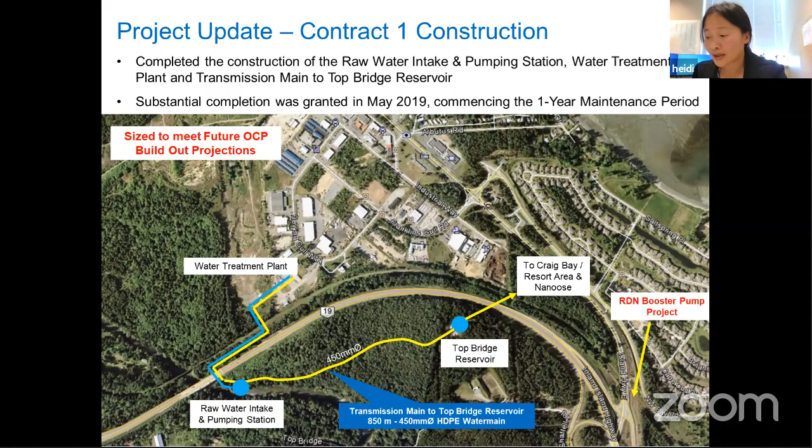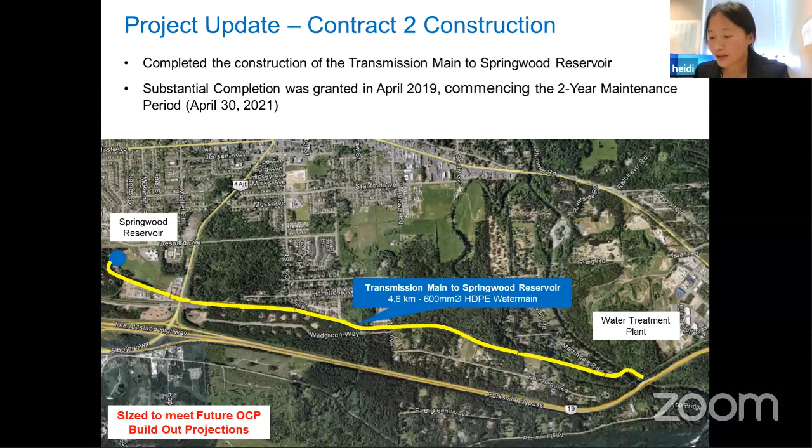Construction project update. Contract 1 works consists of the raw water intake, raw water pump station, water treatment plant, and transmission main to Top Bridge Reservoir. Substantial completion was achieved in May 2019, commencing a 1-year maintenance period. Contract 2 work consists of the installation of 4.6 kilometers of transmission main from the treatment plant to Springwood Reservoir. Substantial completion was achieved in April 2019, commencing a 2-year maintenance period, with final acceptance expected in April 2021.

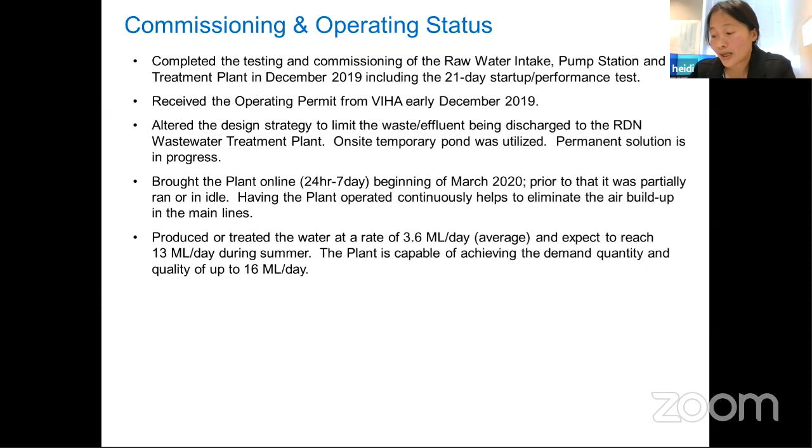Currently, the treatment plant is treating water at an average rate of 3.6 million liters per day and we expect to reach 13 million liters per day during the summer. The plant is capable of meeting the design max day demand of 16 million liters per day.

Here is an overview of our water consumption trend. The black lines are total yearly usage from 2015 to 2019. The yellow lines are how much was drawn from the river from 2015 to 2019. The red line is this year's consumption, 2020.

It shows our average is about 3.6 million liters per day. There was a peak day of 7.4 million liters per day in April due to COVID, and our summers are drier. The green band is the average usage from the Nanoose Bay area of 650 cubic meters per day to 850 cubic meters per day.

The blue line is how much is being drawn from the river this year. Normally in the winter, the river wouldn't be used due to the high turbidity level. However, with the treatment plant now online, we will continue to utilize more surface water from the river as opposed to our wells.

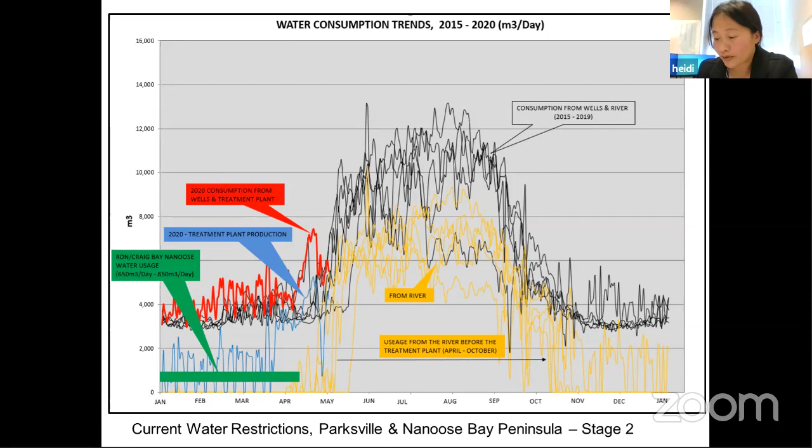So, our raw water intake structures and operations. Daily, we monitor the intake structure to ensure the screens are free of sand. As mentioned earlier, the river water level fluctuates up to 2 meters during heavy rainfall events, and as expected, we experience higher turbidity levels during storm events.

The recent rain event suspended the operation of the plant for 1 day to allow for removal of the sand, rocks, and boulders that built up outside of the intake structure.

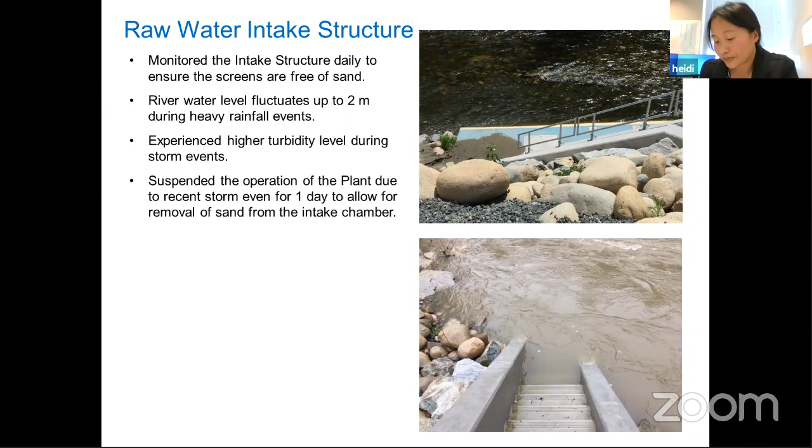This storm event saw the river level reach 4.5 meters, and we had to suspend the operation of the treatment plant for 1 day. It had moved large boulders, rocks, logs, and sand to the intake, restricting flow entering the system.

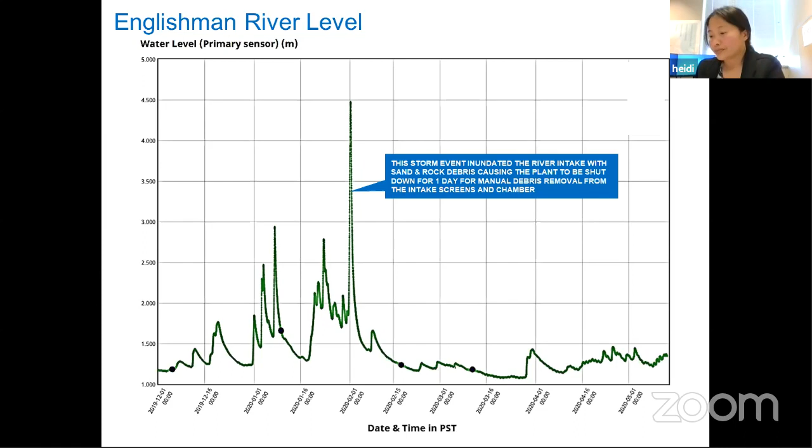So, our water testing and sampling: to date, we found the river turbidity level can go from 0.4 to 200 NTU during storm events. Here are some photos of the raw water samples.

During storm events, higher coagulant dosing was used. However, we expect to ease off or eliminate the usage of coagulant during summer months.

Turbidity level after treatment is less than 0.1 NTU, and our permit requires 1 NTU. We are well below that level.

pH adjustment: the raw water pH is measured at 6 to 7.5. This level is within range. However, it was suggested to increase the pH level to 8.8 to 9.2 to provide corrosion control to our distribution system and our end users.

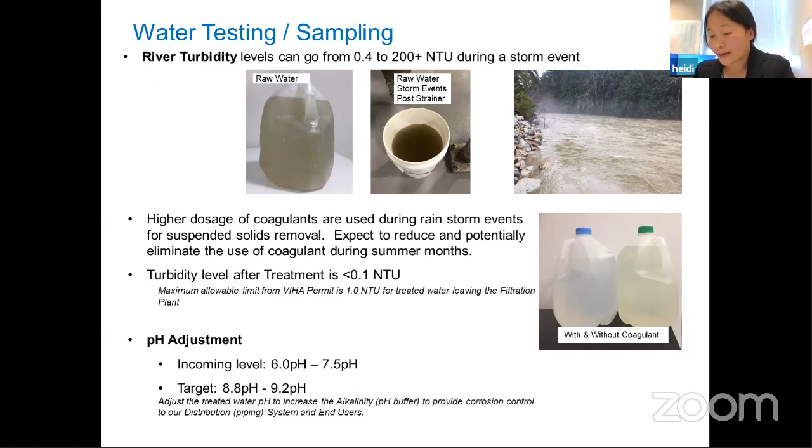Our ongoing works: we continue to work closely with our partners, consultants, contractors, and suppliers to optimize the treatment process and address deficiencies that were noted during the commissioning stage.

These items included constructing a dewatering system to handle the waste flow, monitoring the system to reduce wear and tear on the pump seal assembly at the raw water pump station, addressing and bringing sodium hydroxide pump number 2 online as standby, and addressing the stains and discolorations on the buildings.

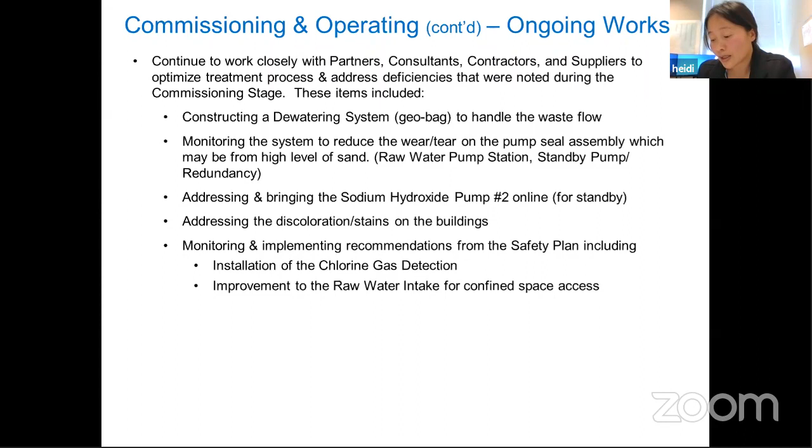Implementing recommendations from the safety plan, including installation of chlorine gas detection and improvements to the raw water intake for confined space access. So, those are the ongoing works.

Project photos. Here is an overview of our pump and treatment process.

Water from the river intake is being pumped to the treatment plant, going through the sand separator, coagulant process, strainer, primary filtration, UV, chlorine, and pH adjustment, with the last stage being to pump to the reservoir for storage.

The rejected water from the primary treatment process is sent to the secondary membrane for further treatment and goes through the same process. The rejected water from the second system gets neutralized and directed to the pond. The system is very efficient, 99% — only 1% of the raw river water goes to the waste stream.

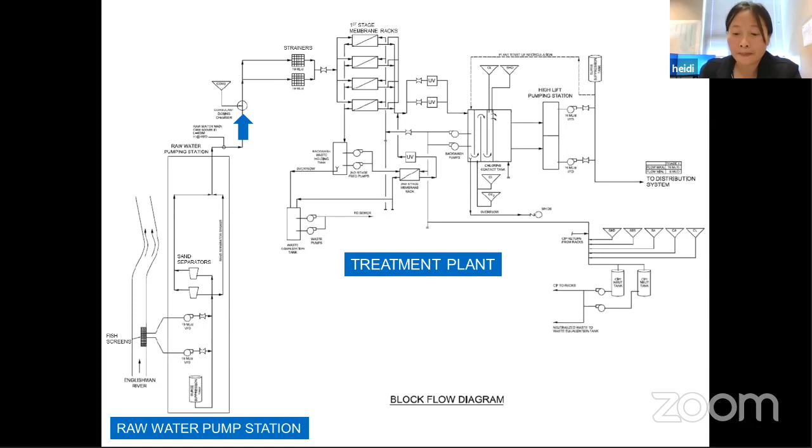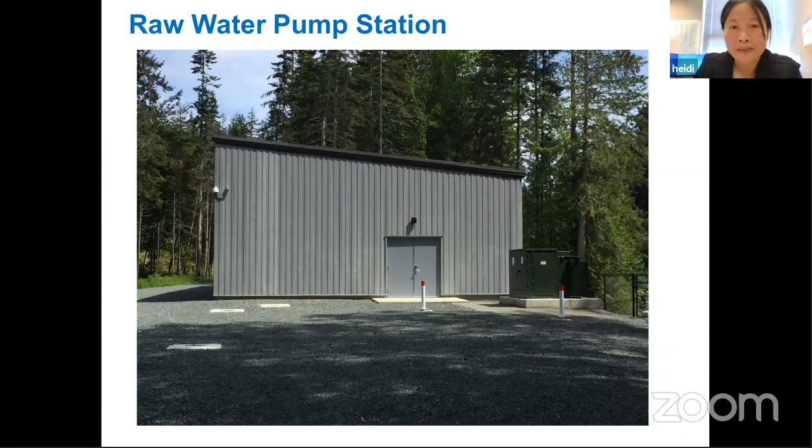Picture of the raw water pump station on the outside, and inside the raw water pump station showing the raw water pumps.

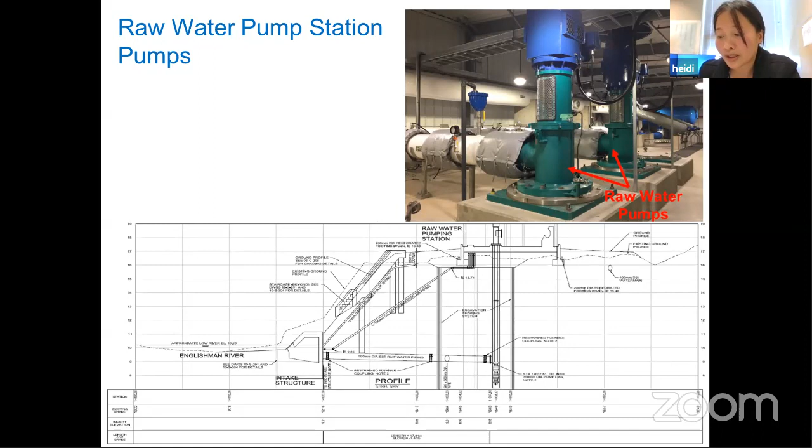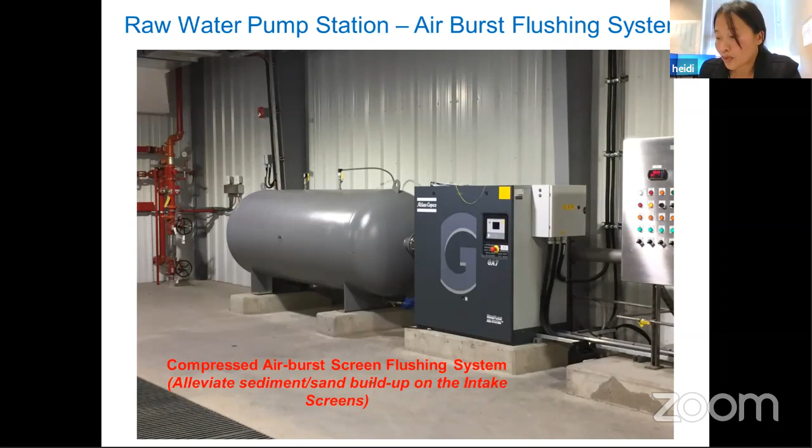Compressed air burst system. This process is to bust the sand from the raw water intake structure. Photo of the sand separator, which removes all the sand before sending the water to the treatment plant.

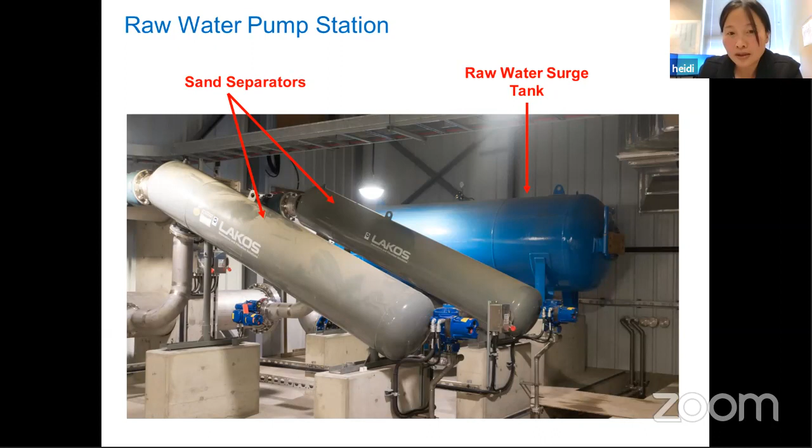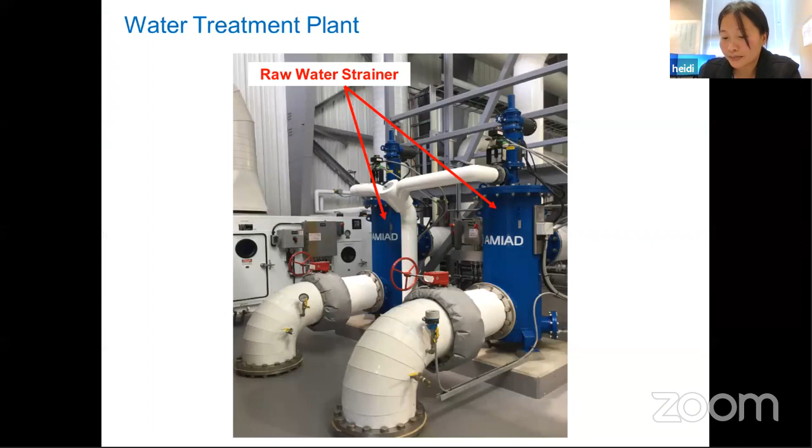Primary filtration and membrane, the Toray ultrafiltration module. There are about 9,000 strands in one of those tubes. The strand is hollow inside, and on the strand there are multiple small holes of 0.1 micron size. The water gets pulled inside the hollow strand to filter out large particles.

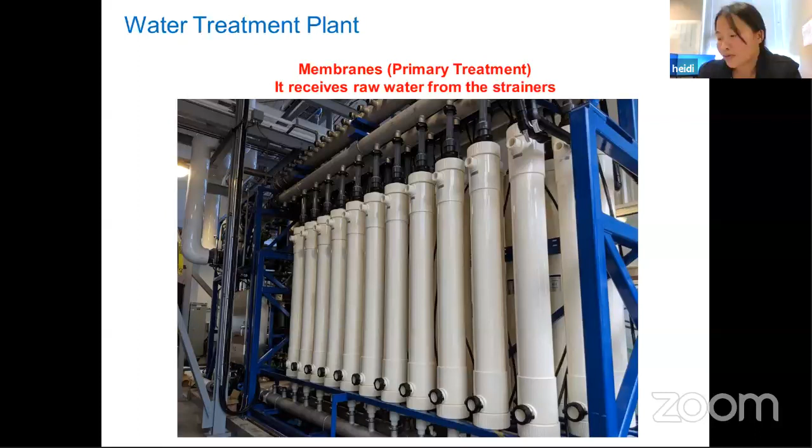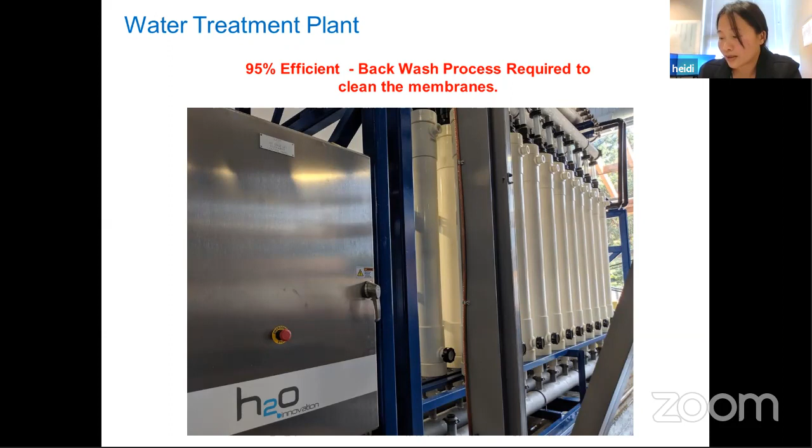Backwash process. This process is required to clean the membrane. The rejected water from the primary backwash filtration stage goes to the secondary treatment stage.

UV disinfection. Water passes through the membrane, then goes through the UV. This process is to kill bacteria and viruses.

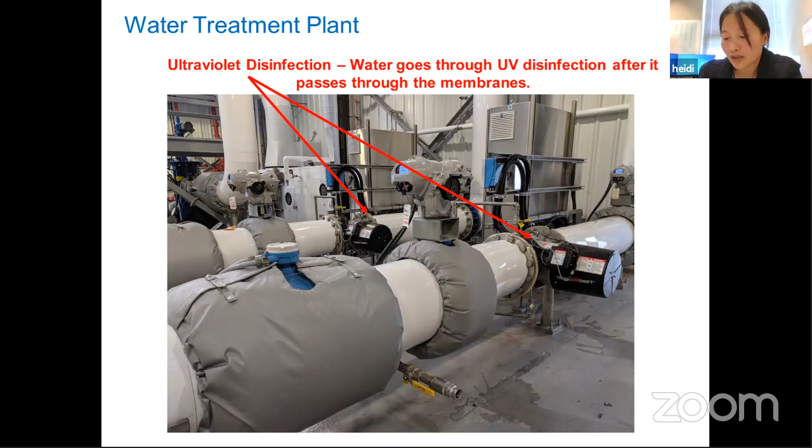Secondary filtration stage. The second stage brings water treatment efficiency to 99%. Only 1% of the raw river water goes to the waste stream.

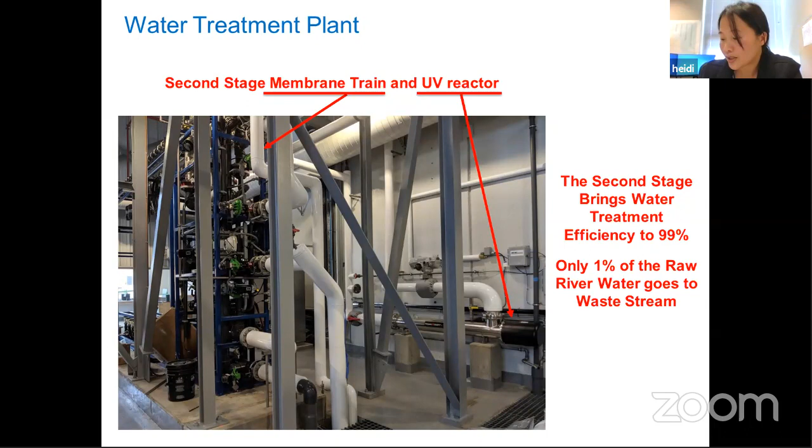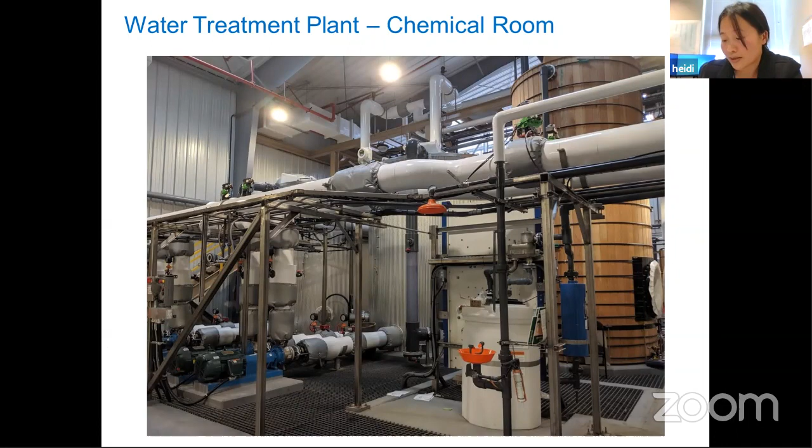Our chemical room, where the coagulant, chlorine mixture, cleaning agents, sodium hydroxide, and sodium bisulfite are stored. Our pump room is the last stage, where water is pumped to the reservoir for storage.

Thank you. Any questions?

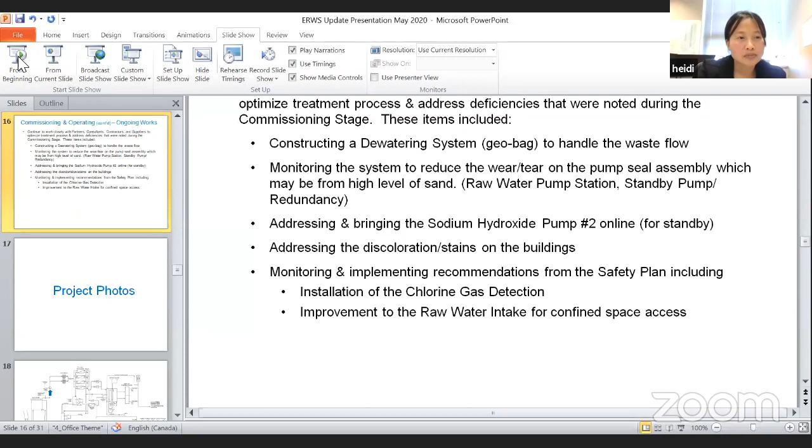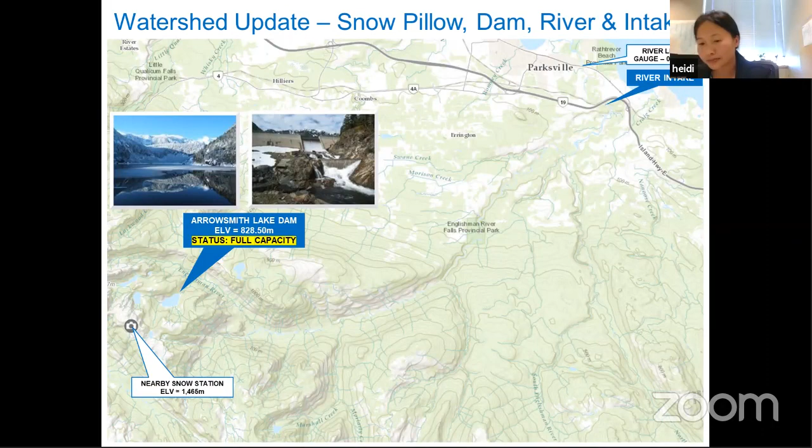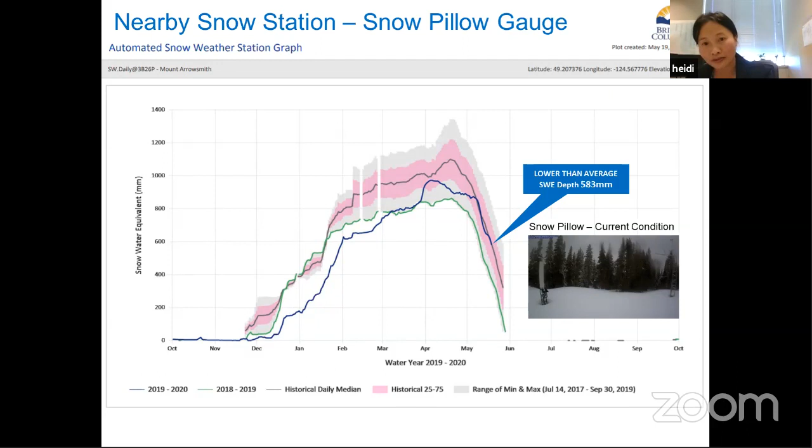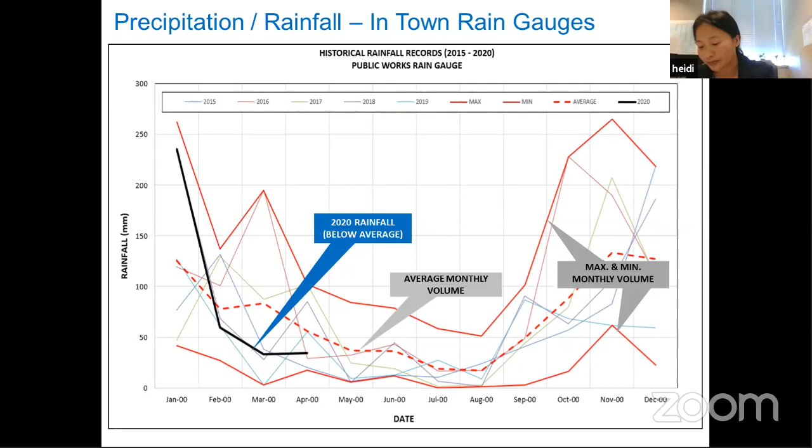The rainfall. This is a graph of the historical monthly rainfall from 2015 to 2020. The red lines are maximum and minimum range. The dashed line is the average. The black line is 2020 rainfall. It appears we are below our average. March and April are drier than normal. Englishman River level: historical record shows the level in the summer months is approximately 1.1 to 1.3 meters, pretty consistent as we have control of the flow from our dam. However, in winter months the river level is about 1.4 to 4.5 meters, commonly seeing a fluctuation of about 2 meters depending on rainfall events. It would be about 4 to 4.5 meters with back-to-back rainfall events.

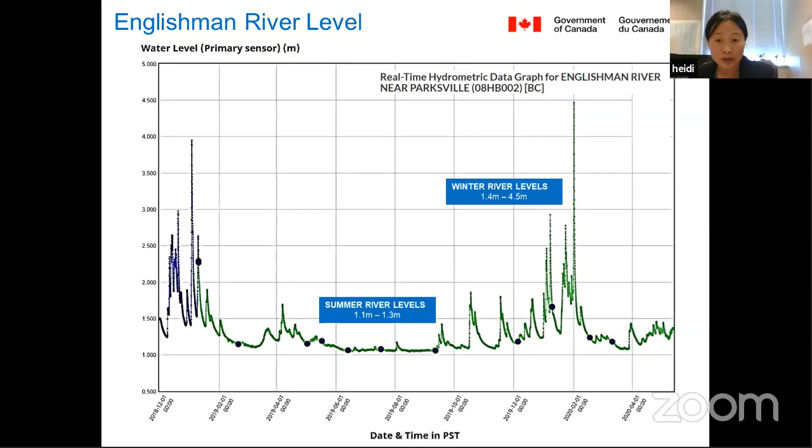Was that okay, or do you want me to go on? I think that was fantastic. Thank you. Yeah, thanks very much, Heidi. Really appreciate it, Heidi. Thank you so much. You did an excellent job. Just want to concur with what Councillor O'Brien said earlier.

Are there any further things? I'm not sure how we're doing public feedback in the COVID era, so forgive me. I'm not sure with AWS how we do that. But if there's no new business, we'll move on to the next item on the agenda.